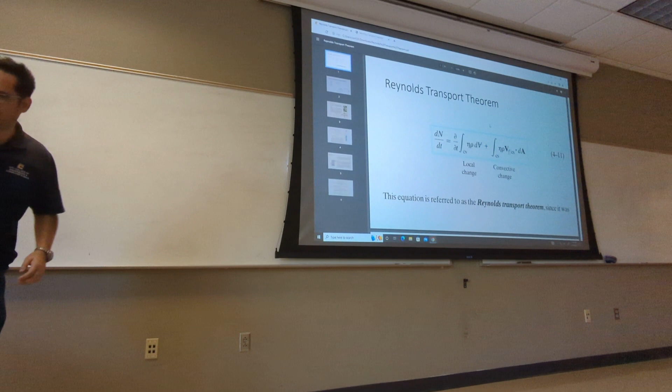All right, now let's go back to our discussion of conservation of mass. We started with something called the divergence theorem. This was our form.

I'm not going to write divergence, I'm going to just write: partial derivative with respect to t of rho dV, for conservation of mass, plus the integral of rho v dot n dS.

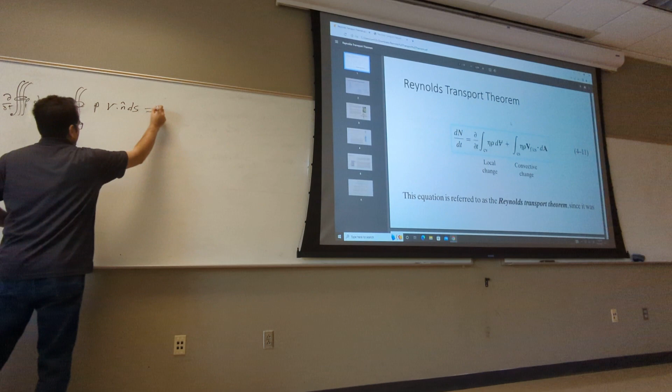So this was conservation of mass we derived, starting with the first principle that the mass of a control volume has a total derivative of 0. Then you use the concept that the total derivative is the inside local derivative plus the part that crosses the border, the mass leaving or coming in. This was the principle of conservation of mass.

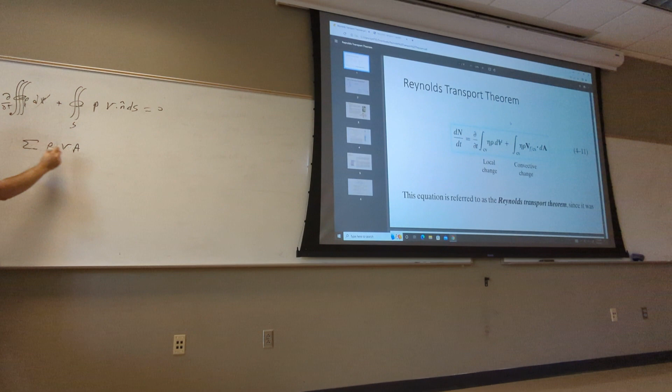We also simplified it for different versions - for example, the sum of rho V A is equal to 0, when you have a constant velocity profile.

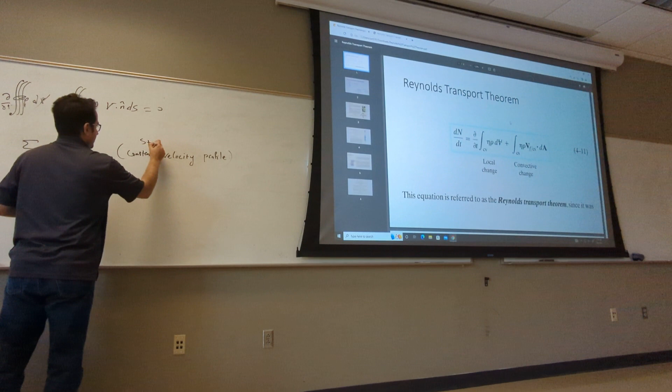So when you expand this integral, first of all this term is 0 for steady state with a constant velocity profile. Steady state means there's no derivative with respect to time, so this entire thing is 0.

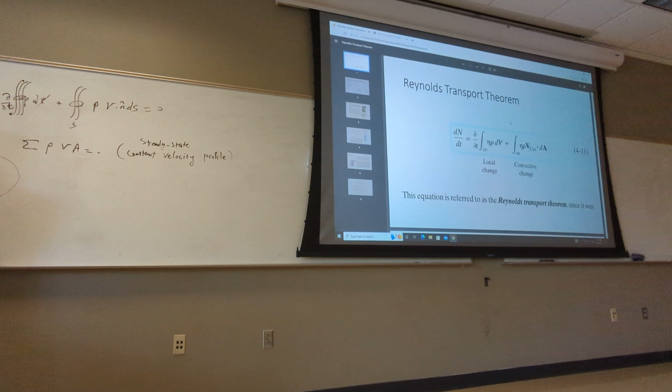And then this integral, when you expand it over the faces of this volume, gives m1, m2, m3, and so on. If we assume the variation of velocity over each face is just constant, we can take that term out of the integral.

And also constant density, or incompressible - aka incompressible. So for this assumption, which is usually these three assumptions together - steady state, constant velocity profile, and incompressible - these three assumptions usually happen in our field, mechanical engineering, for slow speed flow. Some of these assumptions don't hold in aerospace engineering, but in mechanical engineering, most often they do.

So with this assumption, you get rid of this integral, and because it's incompressible, the density is constant, so you take it out. Then v dot n dS over each face is integrated, but because the velocity is constant over that face - not the entire field, just over that face - the velocity may be different here, here, here, but over this face it's constant. You take it out of the integral, and you end up with this equation.

Also, the sum of the fluxes or mass flux—later we define the flux term precisely, but right now just take it as granted, like this is mass flow rate, m dot. The sum of mass rate is 0.

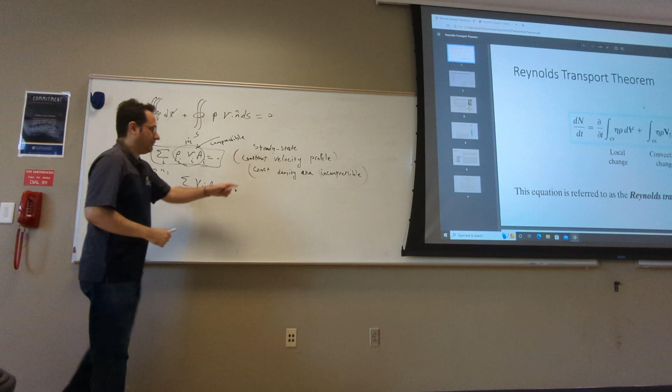Now, if you take it out of the integral, density everywhere rho the same, it's just non-zero times rho is 0. What? That means this term is 0. That means v dot a sum is 0. So this is for constant density.

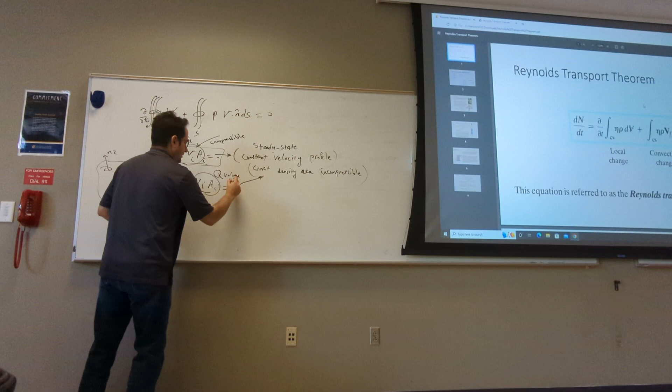So this one is more general. When the density is constant, you take the rho out and you get that. And then we name this as Q, or volume rate. And then we solve a bunch of problems.

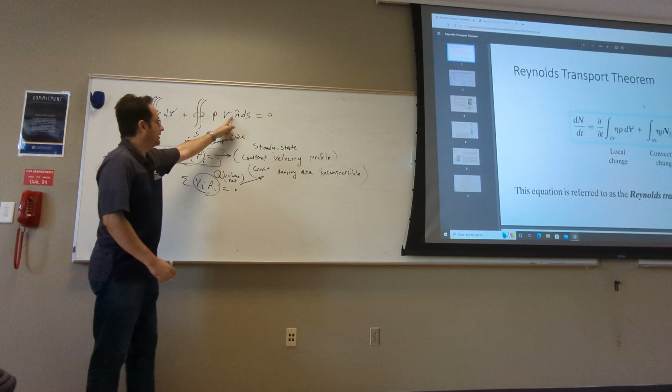But every time I give you a problem, you have to start from here and make assumptions. Is it a steady state? Yes, get rid of that. Go to the next one—is the velocity constant over the profile? Is the density constant?

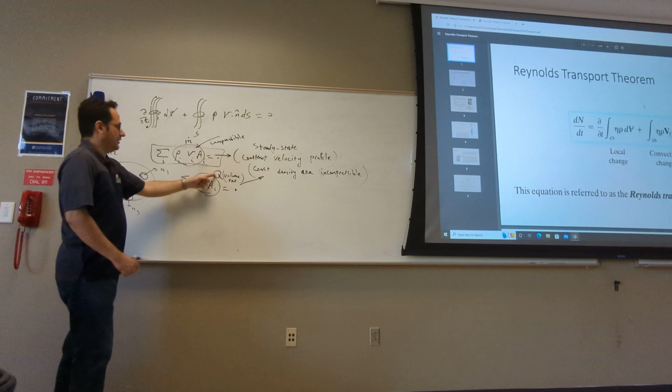If the density is constant, you can take it out, right? But if it's not constant, you have to take it inside this summation. So then you end up with that. This will finally, if all assumptions hold, give the most simplified version: that means the volumetric rate of the flow coming in is the volumetric rate of flow leaving out. And we solve some problems.

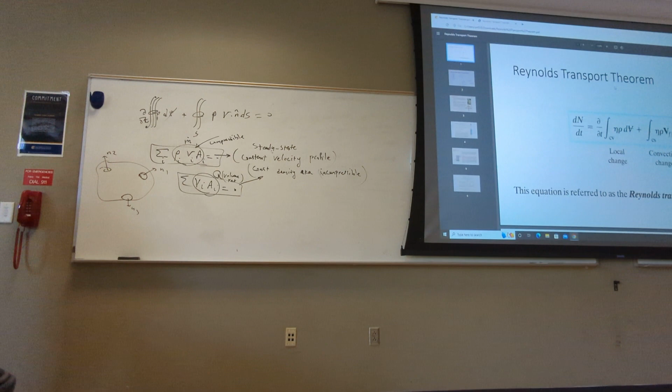Now let's go back to the way the book shows you the same thing we did. We have something called the Reynolds transport theorem. This is the similar approach using the Reynolds transport theorem—they just say the same thing.

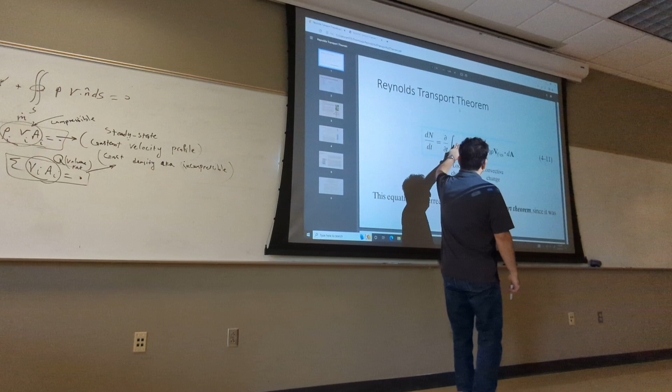The local rate of change over the volume—so eta here is like anything, a placeholder. It could be mass, just the way I said we had a box placeholder. You would place anything in it like mass, momentum, energy, and then you get different conservation equations.

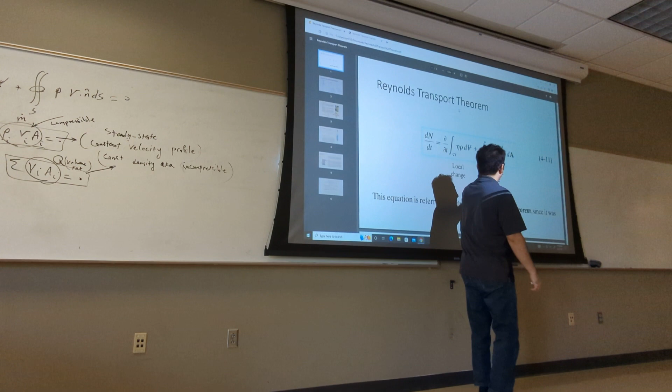This is just like that, plus the net flux passing through the surfaces—call it convective, from convection, the movement of fluid—is equal to the total rate of change. So we call this the Reynolds transport theorem.

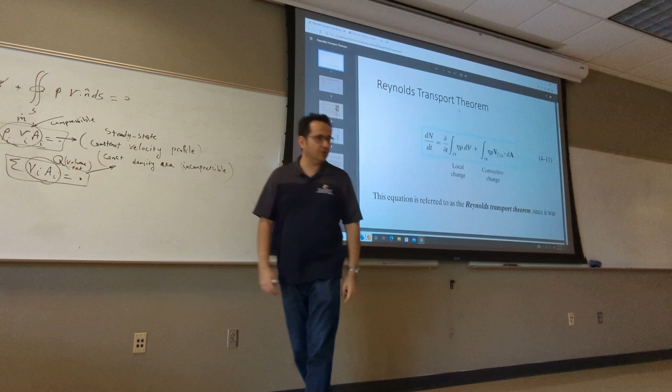We actually proved that using the divergence theorem. So not only did we take it as granted, but we proved using the divergence theorem that you can write this as a surface integral, and convert that to a volume integral using the divergence theorem. Then we end up with an equation like this in differential form: partial rho partial t plus divergence of rho v is equal to 0.

Now the way this book does it, it doesn't show you everything in one point, which is the way it should be—because if you see everything in one point, it's not really distracting you from the concept. The way the book does this, he makes one chapter for that, starting from scratch, not from here, and he takes an infinitesimal element.

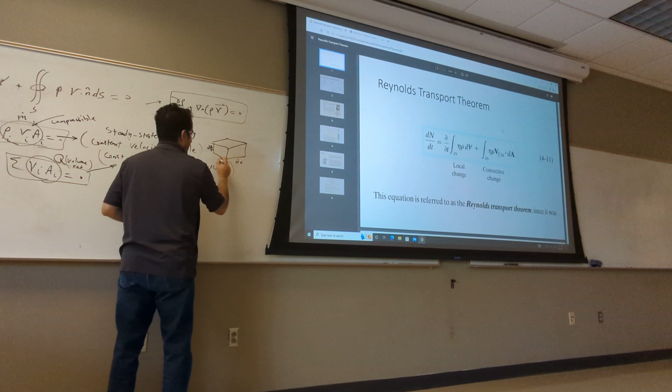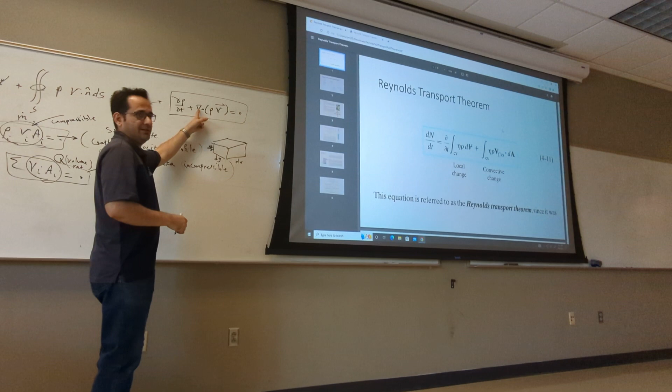So this is like dx, dy, and dz. And for that, he uses calculus in a very approximate, crude character, which is not accurate in general. And then he derives that, and it's like a 20 page derivation—this is chapter 7, if I'm not mistaken.

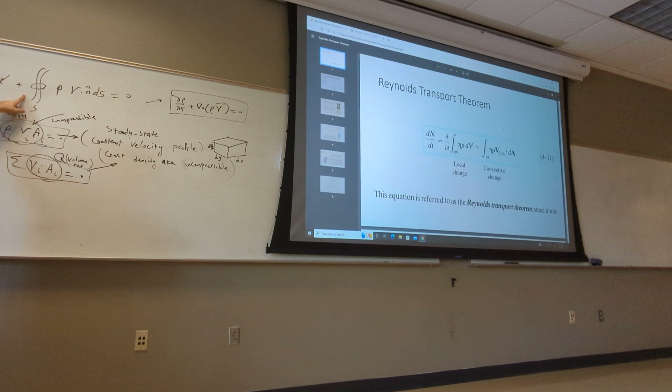We don't need to do that. We just start from that—we already showed that, and we apply the divergence theorem, we get that. This is in the notes, the lecture notes from previous classes. Now all we need to do is just solve some numerical problems, because we know how it's derived.

Now, for this problem, again, you can apply this assumption. What if I have a steady state? For this, it's differential—call this the differential form.

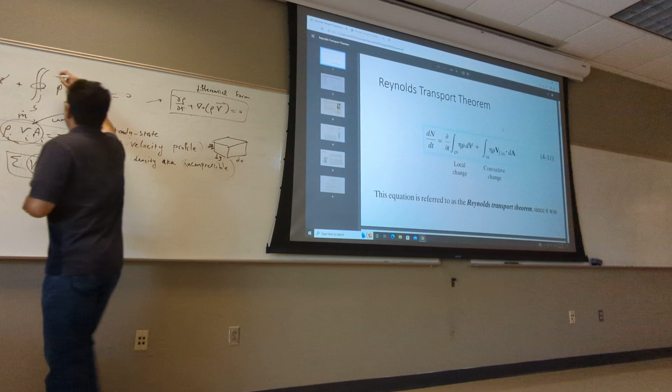Differential form. They call this integral form. Both are the same thing, but this is for a big volume, macroscopic. This is for point-wise, microscopic. So these are the same thing, but written for different control volumes.

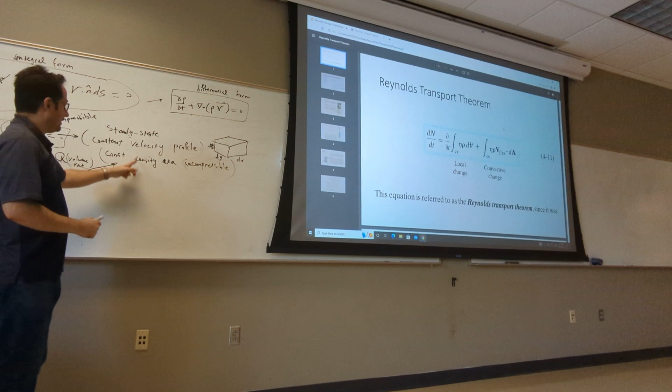Now, for example, I can do the same thing for the differential form, which is chapter 7. So if I have a steady state, what do I get for that? If steady state, what do I get? 0. So for a steady state, again, divergence of rho V is equal to 0.

This is called the steady state conservation of mass. The conservation of mass, or continuity, AKA the continuity equation.

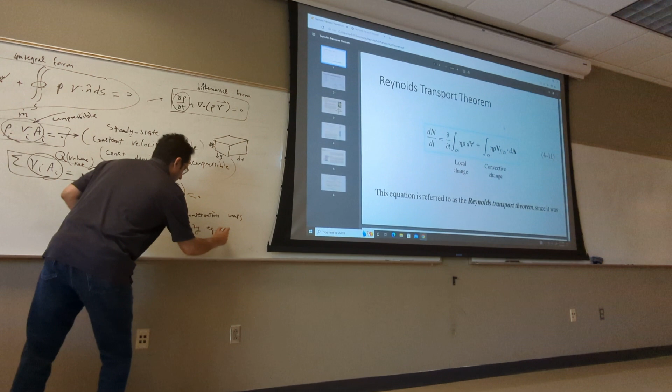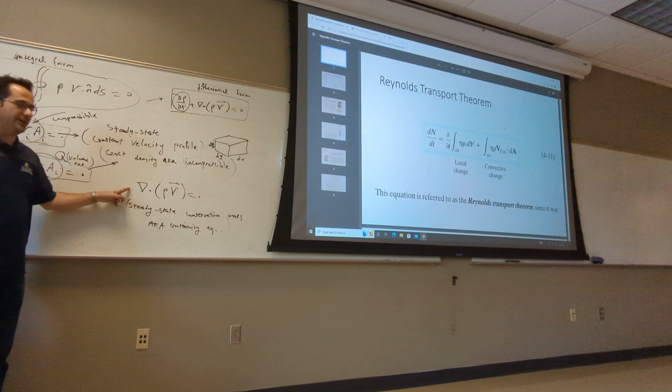Now, if it's incompressible, what do I get? When the density is constant, can I take this density out? Yeah, so you get divergence of velocity is equal to 0. Add to this, plus constant density or incompressible.

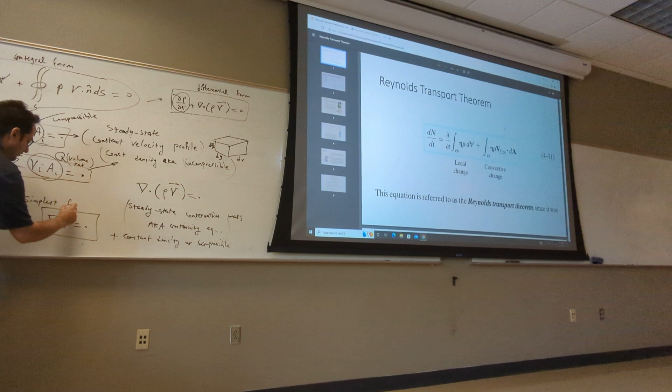So as you can see, this is the simplest form. In differential form, it's called divergence of velocity is equal to 0—this is the simplest form in differential form. The simplest form in integral form is the sum of the volumetric rates is 0. These are the same equation. Now the way the book does it, he has one chapter for that, one chapter for this.

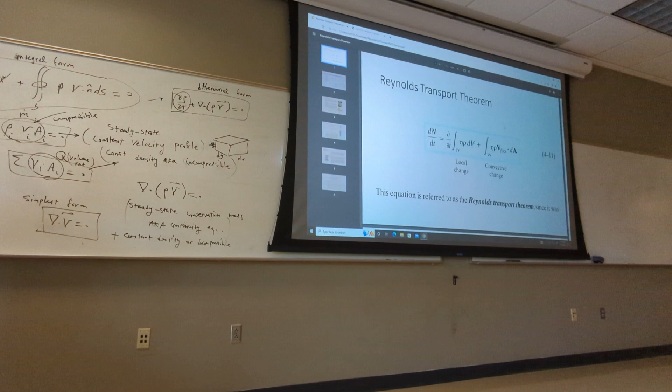Why? This can be beneficial to learn, but also it's distracting. The student may think, okay, this is a different thing, totally different. No, they're just the same. If you follow the divergence, that's the reason I'll teach you divergence here, which is not in the book. Because if you know that, you know all these are just convertible. You can start from here and convert to that. So now, after this, we go to the next one.

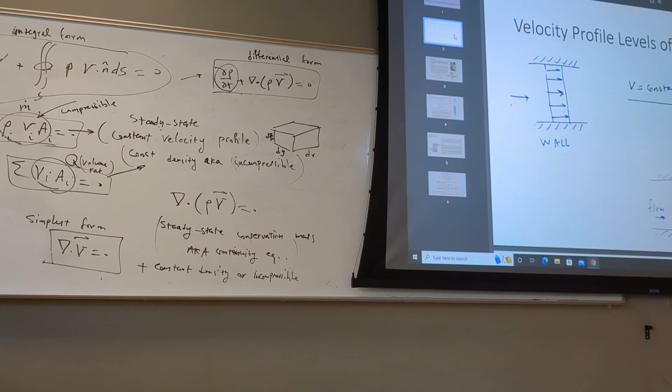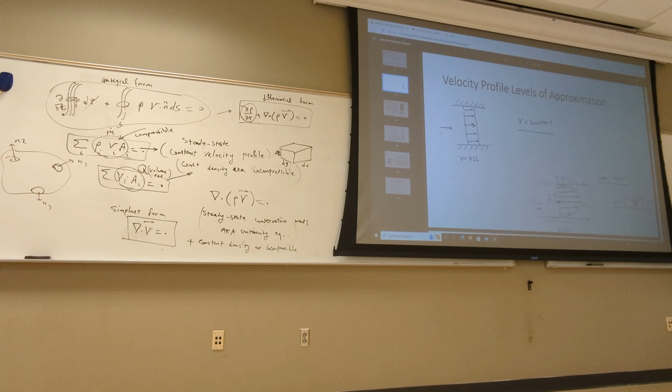One thing I want to talk about here is velocity profile. As you can see, we had an example like, we had a tanker and 2 inlets. And usually the way you see it in the drawing, when engineers make the drawing, you see something like V1, V2, and call this V3. They show it just like that.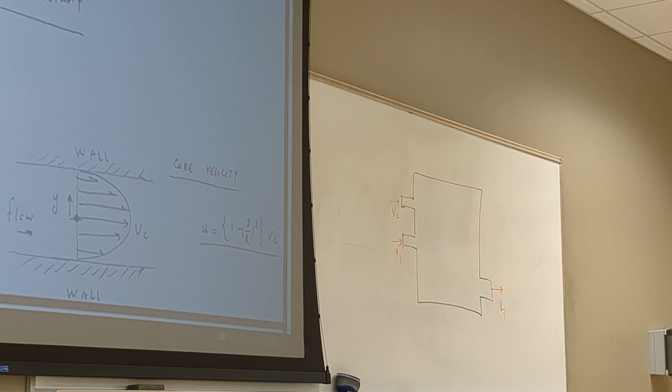But look, in real life, if you have a good camera, if you can zoom on this cross section, I'm going to draw that here, zoomed. What you have is this. This is the upper one, this is the lower one. And the velocity is not constant. The velocity is like 0 here, then 1. Why? Because it's viscous. And you have a sudden increase in the velocity, and then it goes back like this.

That's the velocity profile. When we say constant, it's not actually constant. There's no way on the wall it can avoid going to zero. It must go to zero. So the velocity is almost constant here. Again, you have some variation, but roughly constant here, but zero at the wall.

Now you may ask, why do I get just one row, a constant? The answer is, assume the fluid doesn't have any viscosity, zero viscosity. What happens? If it has zero viscosity, there is no attachment to the wall. The flow goes everywhere. Imagine, this is not going to happen in real life, but imagine there was no viscosity. The flow would pass through this outlet with constant velocity. Why? Because it doesn't even feel the wall. The only way to feel the wall is to have viscosity attachment.

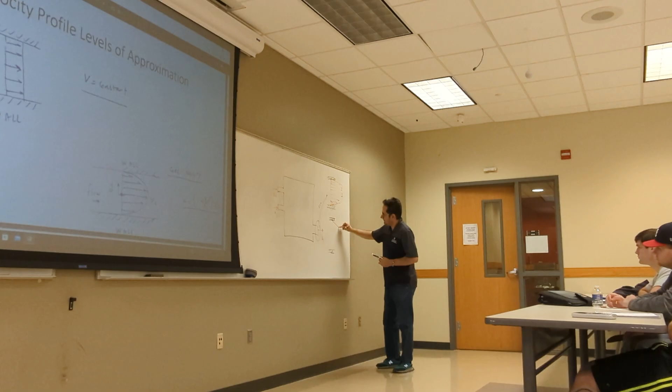Imagine the fluid was not ideal. Then what you have is like this. We call it V core, or core velocity, the velocity at the very center of the core, and then it's zero on the top, zero on the bottom. Now, if you put your coordinate system here, this is y. So y is 0 here, y is equal to some distance, call it r, or you can just call it a.

So the velocity profile in this case is written as u versus y equals V at core times 1 minus y over r squared. This is a parabolic velocity profile. You can see that if you plug in r, and this r is in fact y, if you plug y equal to r, what do you get? R divided by r is 1, 1 minus 1 is 0. If you plug y equal to 0, what do you get? 0 divided by r is 0, 1 minus 0 is 1, times VC, V at core. So you get this velocity profile.

Second order parabolic. You may have third order. These are just approximations. But this is more real when you have oil or honey, a very viscous fluid in a small diameter. But if you have a very large diameter or gas or something, you can say the slope here is so sharp that you almost see a constant, just like here. I'll show you here. V constant. In that case, V core is just the same.

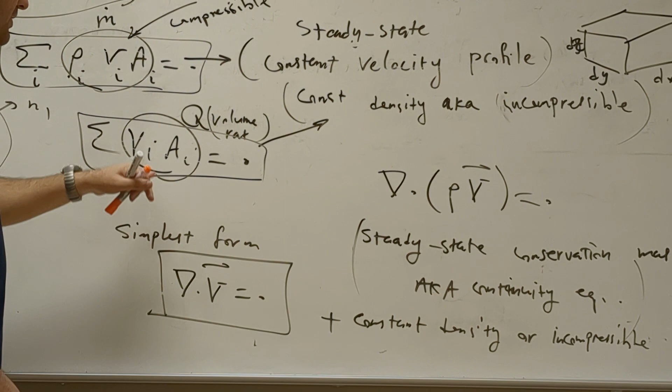This is just a hint: when I give you a problem, always ask, is the viscosity effect important? If it's important, you have to take the second order parabolic relation, and you can't start from here - you get a zero. You have to go back and ask again: is it a steady state? Yes, zero. Is it incompressible? Yes. But is the velocity constant? No, the velocity in that case is not constant. So instead of this form, you have to have this: the integral of v dot n ds over the surface equals zero.

For the constant velocity, you get that out of this when you expand the integral. Make sure you don't make these mistakes on the test.

Now the next question here, it's one of the problems in the book. It says you have a water hydrant, and it's got two outlets. Now we need to dim the light. You already solved a few problems. The participation is not good today. So here you have a water hydrant, and the diameters at different points are given, as you can see. Let me see if I can zoom here.

There you go - here is 75 millimeters. The velocity is also given. Now every time velocity is given like just one data point like that, it's implying that it's most likely constant. That means either the diameter is so large or the fluid is not very viscous at that velocity, so the parabolic effect is not as strong. So you always have a constant. So at this point, also the velocity is given.

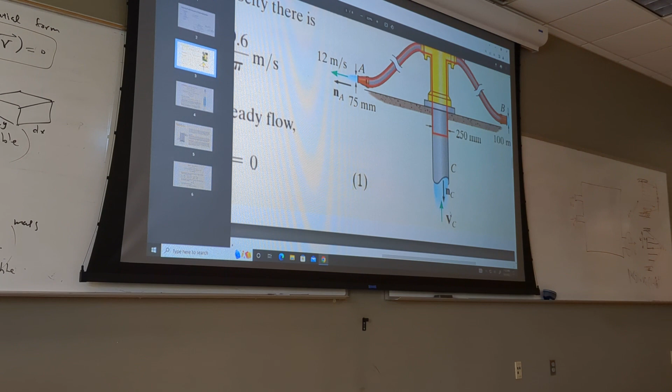So when you dot product NC with VC, what do you get? Positive or negative? Negative - they're 180 degrees out of phase. So you get a negative here. And then VA dot NA - look here, NA and VA, are they in the same direction? Yes, so the dot product should be positive. What about the other one - are they in the same direction? Yes, positive. So all of them are positive except C.

Now you substitute numbers into this equation: you get velocity at C times AC with a negative sign, plus velocity at A times AA, plus velocity at B times AB, equals zero. Do I have velocity at B? No, that's actually the unknown in the problem. And then you solve it for velocity at B. Now you can also find the volumetric rate, but you have to read the question carefully - like on the midterm, when I say midterm, it's going to be the next midterm.

You have to read: am I asking for the velocity? Am I asking for volumetric rate? Or am I asking for mass flow rate? That's the most frequent one, I usually ask for mass flow rate. So if I ask for mass flow rate, what do you report? Are you going to report dV? No. So what do you write? The answer.

If I say find the mass flow rate at B, you do rho times that. Rho times Q. It's just a definition.

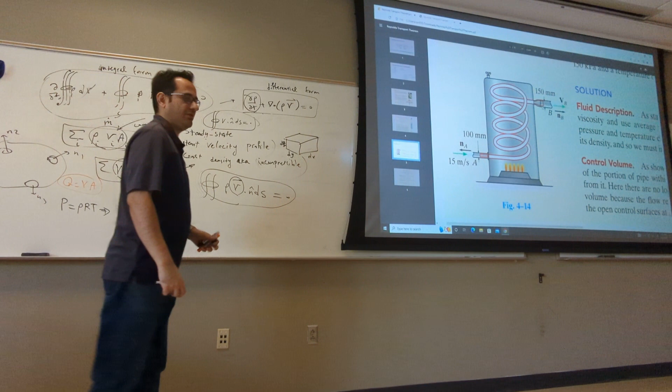But look, the density in this cross section is rho A, and here is rho B, so I cannot just take it out and say 0. So I have to evaluate this integral over all the faces. So let's say we have 3 faces: one here, face number 1, the other one is the wrapper around this, face 2, and then face 3 at B. So this pipe, which is my control volume here, is enclosed by faces 1, 2, 3. And then I evaluate this integral over each face, so it's going to be the integral over S1, or call it SA, over A.

SA, rho V dot N ds plus the next integral over the surface of the spiral, rho V dot N ds plus the integral over the final closing face B, SB, rho V dot N ds. This sum, according to continuity, must be 0 because it's the total change in the mass of the system. So what do I get for this step?

Tell me, what's the direction of velocity on the wall? Everywhere, this is the normal, and this is the velocity. Everywhere at the wall in this spiral pipe, what's the relation between velocity and normal? They are orthogonal, so the dot product is 0. So this entire thing is 0.

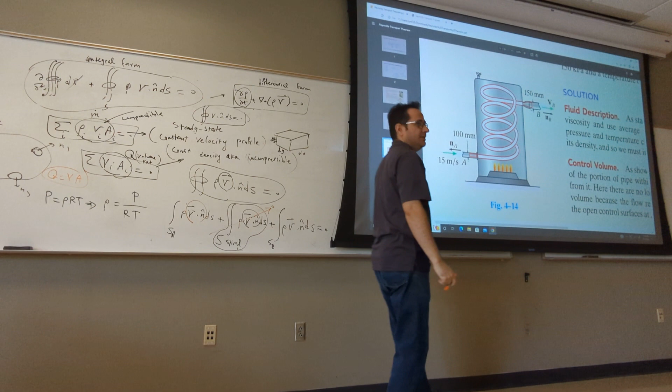Now here, V dot N over A. What do I get? N is this way, V is this way, so V dot N is negative. This guy becomes rho, and then VA, and it's negative.

Now look, rho is not just rho in the entire fluid, it's rho at point A, because after this point I heat it up, and rho will change at that point according to the equation of state. So it's rho A, VA, times the area at A. Why? Because this S, when you take the integral, it's going to be V times S.

And then finally this term, what do I get for that? Rho B, VB, AB. Is that right? Positive or negative? It'd be positive. That's right.

Quiz waiver. You see, always hunt for quiz waivers. They're very, very random, unexpected. The only way you can hunt it is to fully listen to what I say.

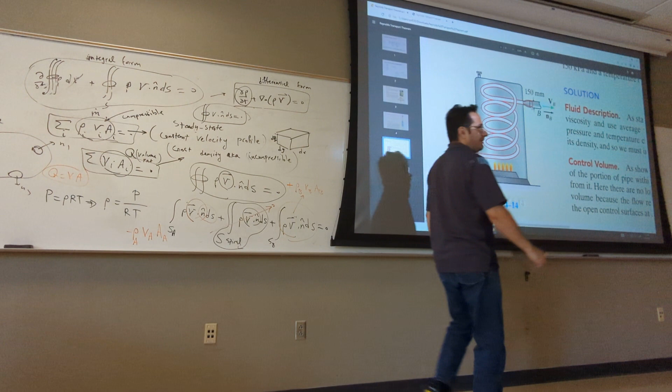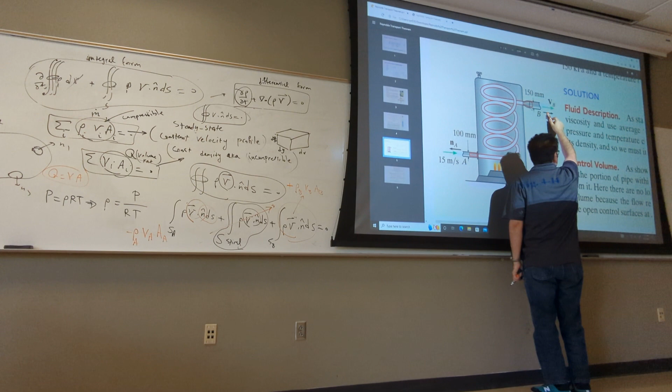So look, how did I get that? You just come here and evaluate the integral over this. I know the velocity is the same direction as n, so v dot n is positive VB. But as I take the integral, there is the AB, and the density at B is not just rho, it's rho at B.

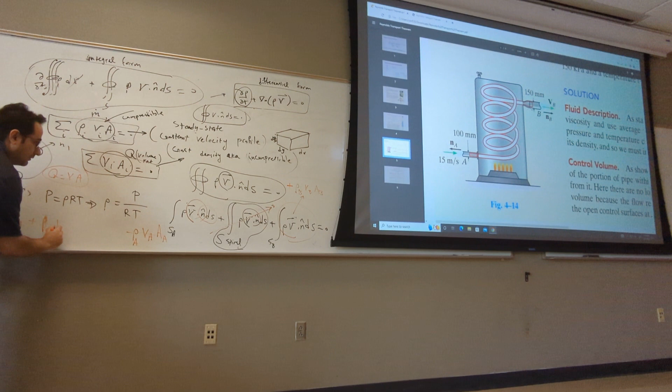So put them together, what do you get? You get right here: negative rho A, VA, AA, plus rho B, VB, AB is equal to 0. That's what you get.

So the answer, the way the book solves it, starts with the general conservation laws, then goes to the assumption: is it transient? No, 0. And then you evaluate the integral, and you get the same relation. You put a number, and you find the relation between rho A and rho B.

Now you apply the knowledge from the previous chapter, equation of state P is equal to rho RT. When you apply that relation here, you get P at A, you have a relation here, you put the temperature, because the question gives you the temperature and pressure, and you get the ratio between rho A and rho B is equal to 1.60. Put it in this relation, and you get VB is equal to 10.7 meters per second.

We're just playing with the equations.

Now in the midterm, I may just give you this. And I say, well, consider the velocity here is parabolic, not constant. Let's say the velocity here is like this, you see the cursor, like that.

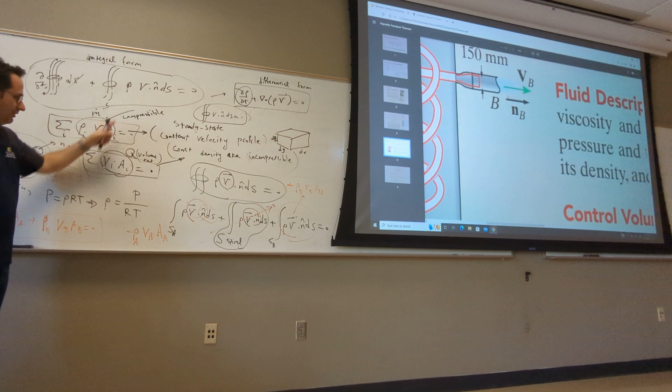And solve it if the velocity is parabolic. Then you start from here. What do you get? 0, not transient. Here, what do you get? You get something like that. This is 0 again. You get this, but when you evaluate this integral, you cannot simply say v dot n and take it out of the integral, like I did here. You have to evaluate the integral over that surface.

And if you can't evaluate the integral over that surface, because this was covered in calculus, unfortunately we don't have time to help you. The only way I can help is if you come to my office and we practice individually. There is no other way. You don't have time in class to go over the very basics.

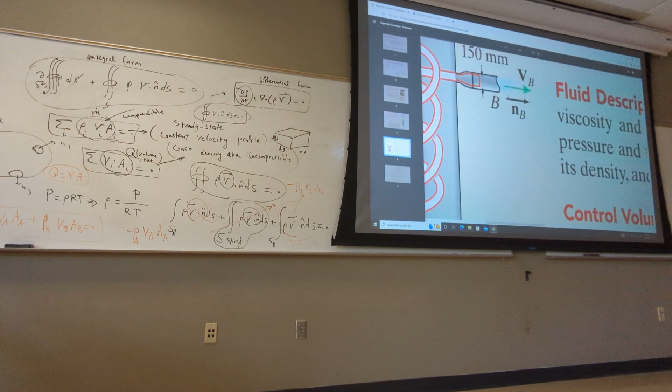Next problem. So basically we already solved, I think, 3 more problems last class. We also had a moving control volume. So I think that's enough for conservation of mass. Now we want to go over conservation of momentum, chapter 5. So let me erase this — actually, I do not erase that.

So the next chapter after conservation of mass in your book is the energy equation. You have conservation of mass, and then he goes to the energy equation, and then he goes to momentum. I found it a little bit distracting to go from conservation of mass to energy, because that's not the way the Navier-Stokes equation is even written.

The Navier-Stokes equation is written like this: you have conservation of mass, which you already have, then conservation of momentum, and then conservation of energy. These all together constitute something called the Navier-Stokes equation. So after conservation of mass, the most natural choice is to go to conservation of momentum.

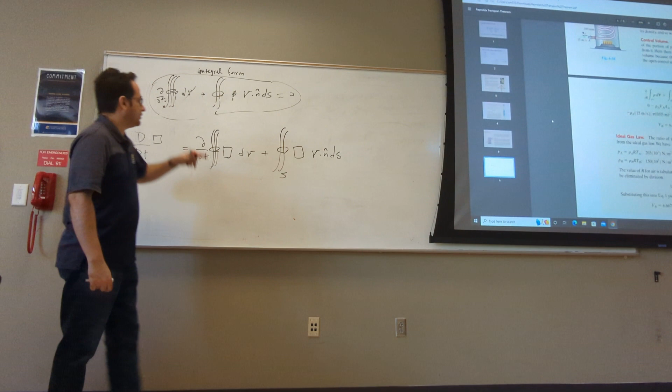equals the local derivative plus, this was the volume, plus the surface integral of v dot n ds. And I said this box is just a dummy placeholder, you just substitute things. Like if I have mass, mass is what? Rho times volume, right? So if I take mass per volume, which is density for the entire thing, you just plug in rho, and then you get what?

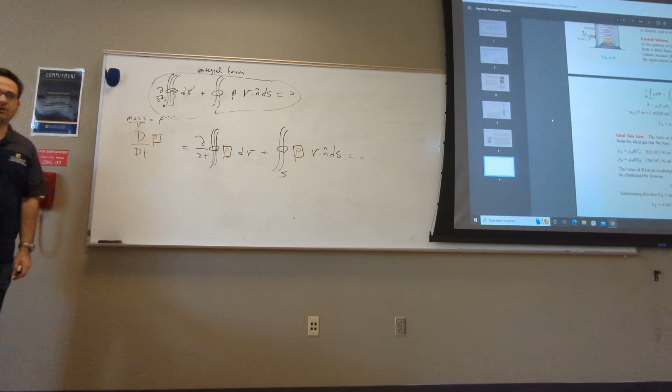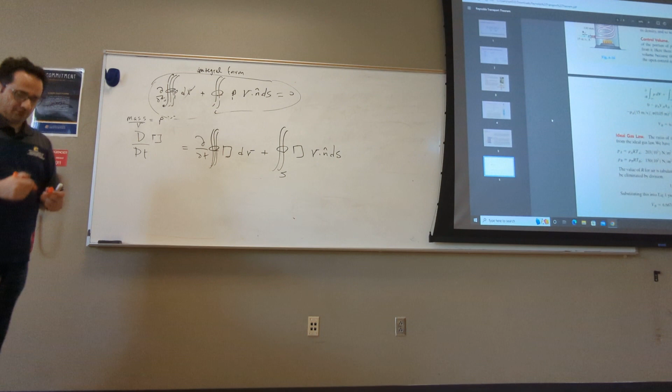Now, instead of rho, let's substitute momentum. But before we substitute momentum, I have to define what the momentum is. This is generic. So before I substitute the momentum, we have to talk about what momentum is.

Now we go back to Newton's laws. Newton's second law says sum of forces is equal to ma. This is a vector force, and the resultant force on the system is equal to the mass of the system times the acceleration of the center of mass.

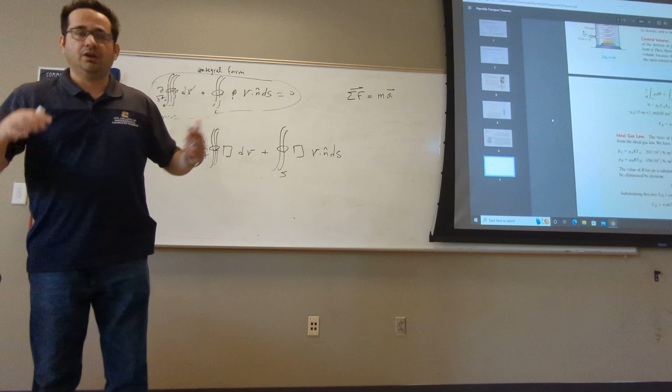How many of you guys didn't have dynamics? You didn't have dynamics? Okay, we should have done. I haven't, yeah, all right. So what about vector statics? Everybody has vector statics? So here is the thing.

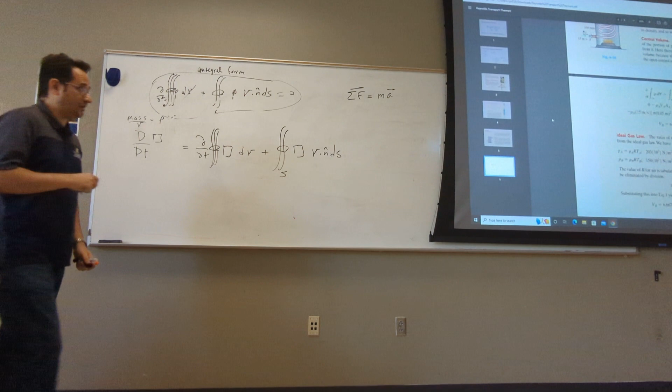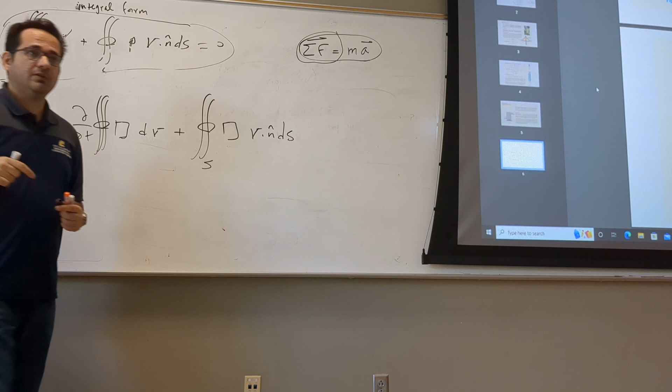You see, this classification isn't very different. When we say vector statics, we're talking about this one. When we say dynamics, it's talking about this one. And if you know the 5 steps - system, FBD, equation, solve, verify - you don't have any problem between vector statics and dynamics, except in dynamics you have to have an inertial force on your FBD. The way you put it, you just plot it like vector statics, but with the opposite direction of inertia, and then the problem becomes vector statics. If you haven't studied that way, you really need to go back and study it in unified form.

Because all these courses are just the same. You just look at a special instance of each one of these.

Now look at this equation. This is a simplified version. The actual version of Newton's law is sum of forces equals, you see this is dv dt, acceleration is the time derivative of velocity. But if you take the mass inside that, you have d dt of mv. This is the actual momentum equation.

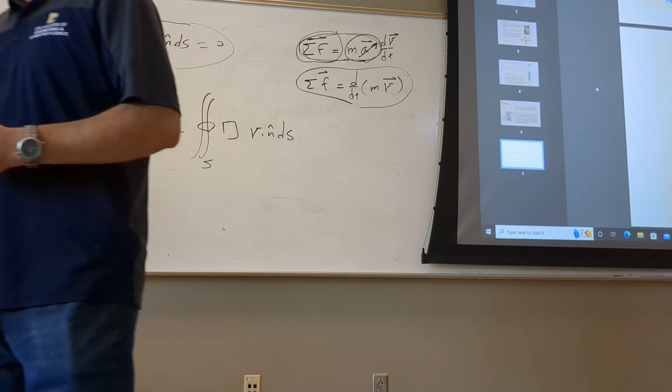Now in three-dimensional space, I want to ask someone - do not answer it. In three-dimensional space, how many equations is that? 1, 2, 3, 4, or 6? In three-dimensional space, how many equations is that? This equation by itself, how many equations in 3D?

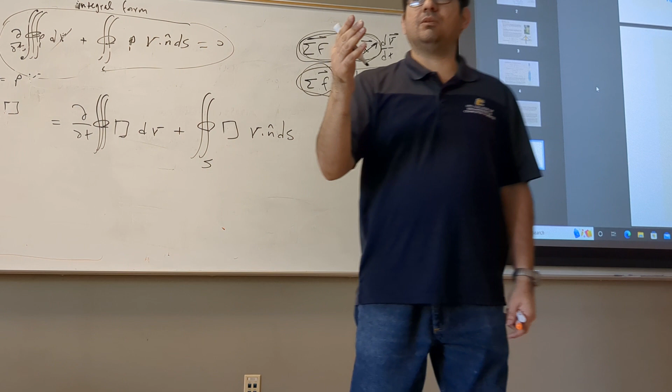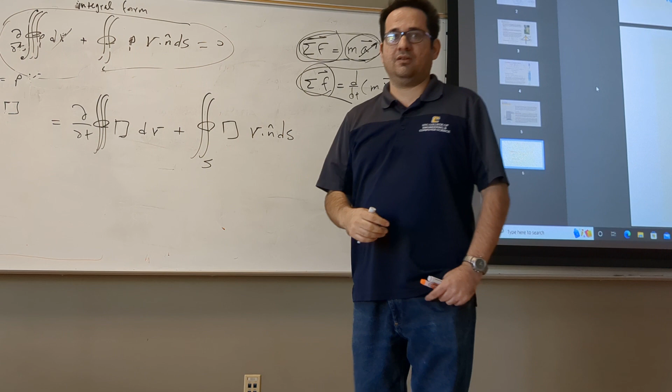What is this? Sum of forces, which is a vector. In 3 dimensions, how many pieces of information do you need to express a vector? 3. So this is just 3 equations, it's not 6. So it says sum of force in X, momentum in X.

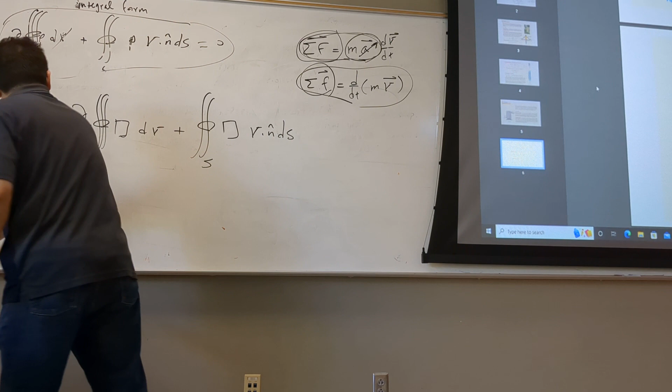In fact, you can write it like this. Sum force in X is equal to d/dt of mu. Sum force in Y is d/dt of mv. Sum force in Z is d/dt of mw.

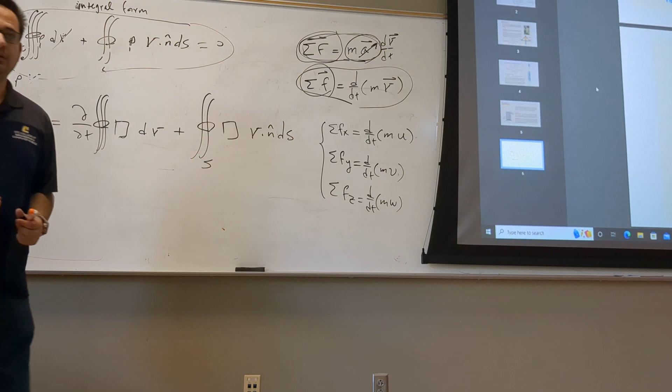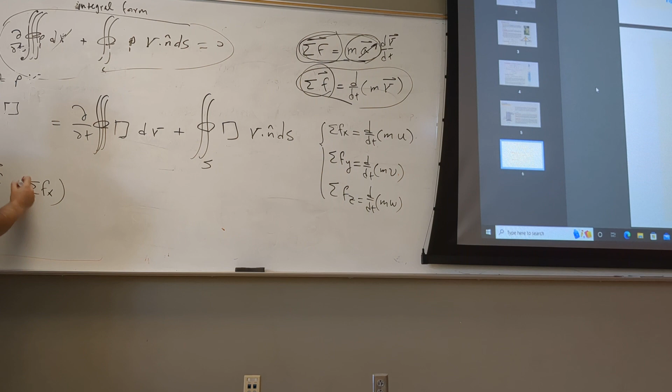I should not need to explain this, but I'll do it again and again since this is something you should know by now. The way you derive this: sum of forces F is sum of force in X times I, plus sum of force in Y times J, plus sum of force in Z times K. That's the left hand side. For the right hand side, you have d/dt of mv.

Then you substitute V with the relation: d/dt of m times, for velocity V, u times I plus v times J plus w times K. Now simplify it, take d/dt in, so you get d/dt(mu) I, plus d/dt(mv) J, plus d/dt(mw) K.

So look at this, that's the end result for that, and the end result for force. Now according to Newton's law, these two are equal. This is called Newton's second law. We usually go with acceleration, but in the correct form, they define this as momentum. They call this momentum.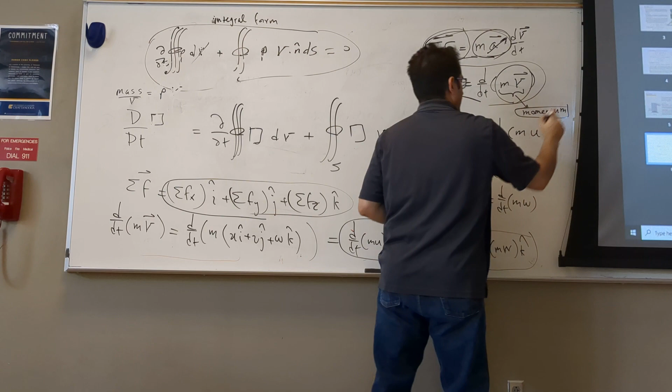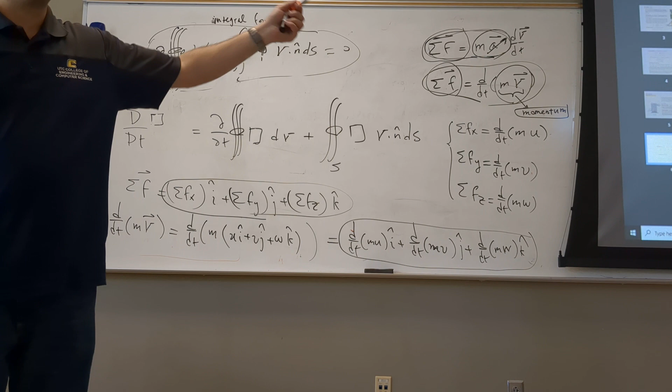So when you write it in vector form, that little equation right here is three equations. It's not just one line, not one number. If in the midterm you just write one number, you get a 0, I don't even grade the rest. That means you've never understood it, never practiced it. This by itself is three equations.

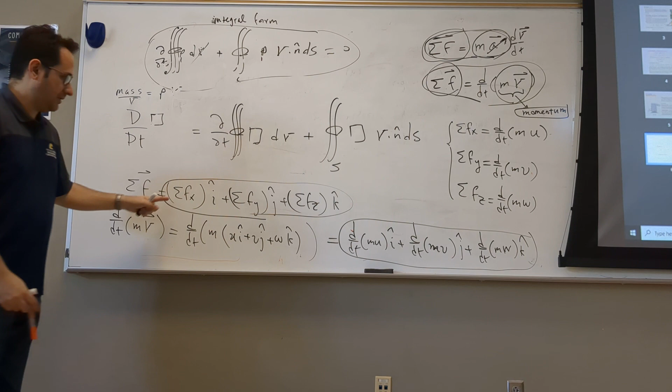Here, force is this, momentum is this, make them equal. So the x component: after you make them equal, the coefficient of I, which is these two guys, they are the same. The coefficient of J, which is these two guys, are the same. The coefficient of K are equal, same. Vector identity.

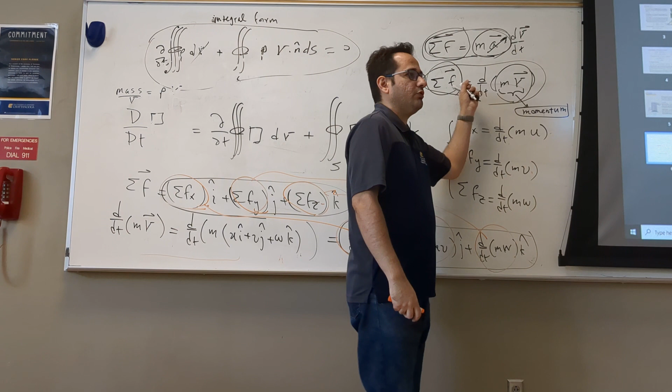So that is your momentum equation. Now I want to apply this to my control volume here. You see the dummy placeholder here. So let's do that. This needs to go up.

As you remember, when we put mass here, we didn't put m, the mass, we put rho, which was the mass per volume, the normalized mass. If I normalize my momentum by volume, what do I get? If I normalize mv by volume, you get rho times velocity. So the one I plug into my generic relation is rho v.

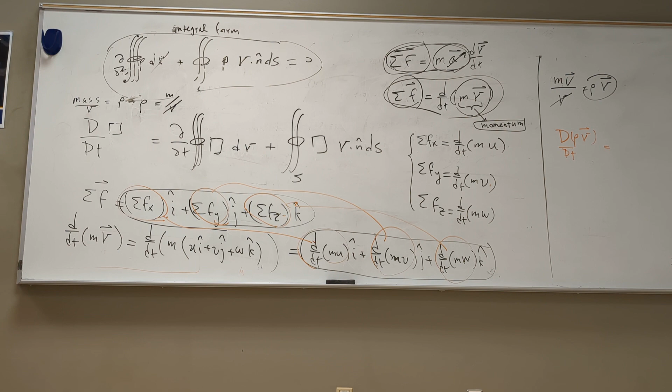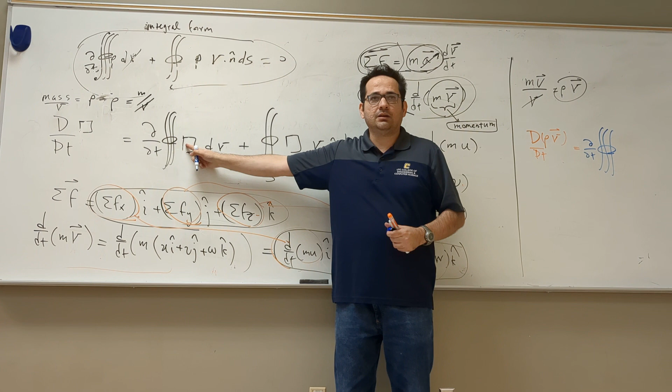So let's do that. I plug in here, starting with the left side: the total derivative of rho v dt is equal to... let me use the relation: partial derivative with respect to t of the volume integral of rho v, dV. And this V is not velocity.

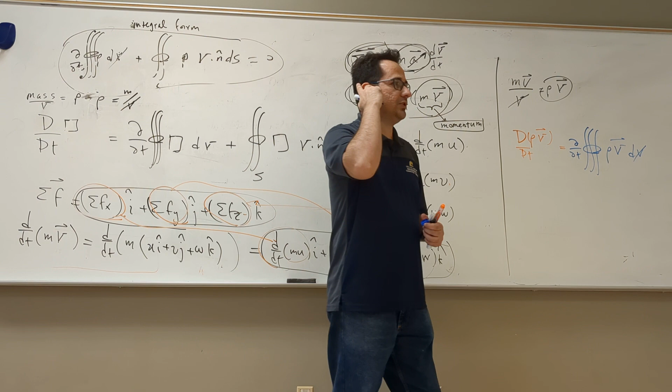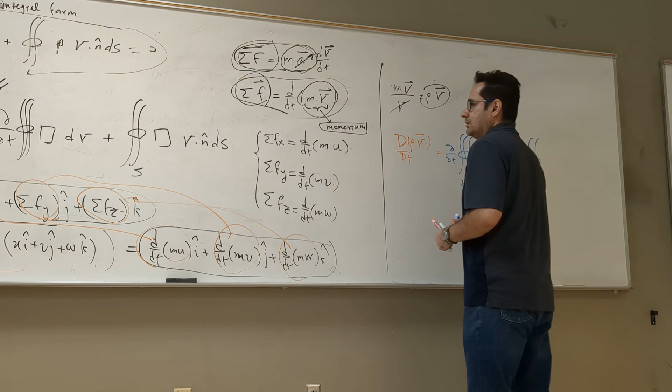That's the reason some books have problems distinguishing volume and velocity, they put a dash on it. So this is over the closed volume, plus the surface integral. What should I put here? Rho V. And then it also has a V dot n by itself, and we've talked about that a lot.

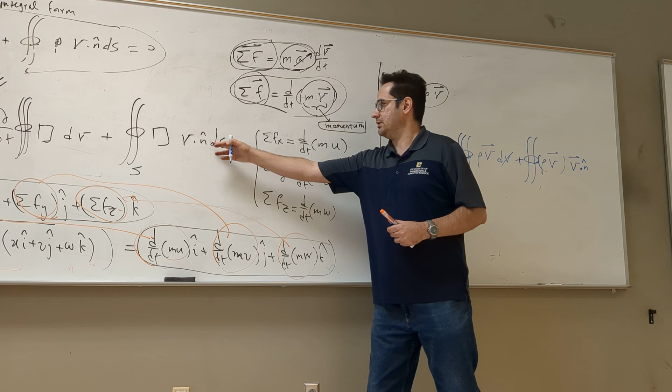So the total time derivative of momentum, is it zero? Newton's law — we just wrote it. Momentum is conserved, so there's no change? No. Newton's law, I just wrote it and erased it.

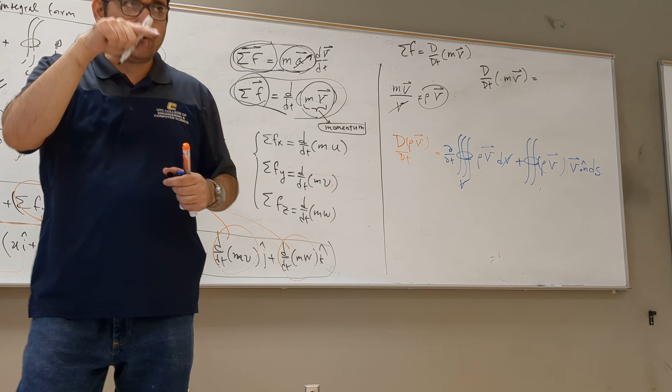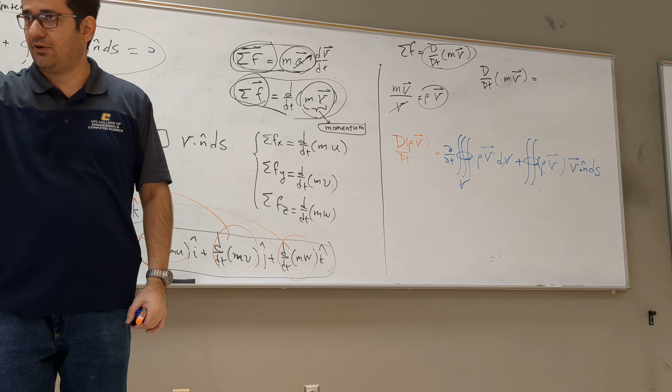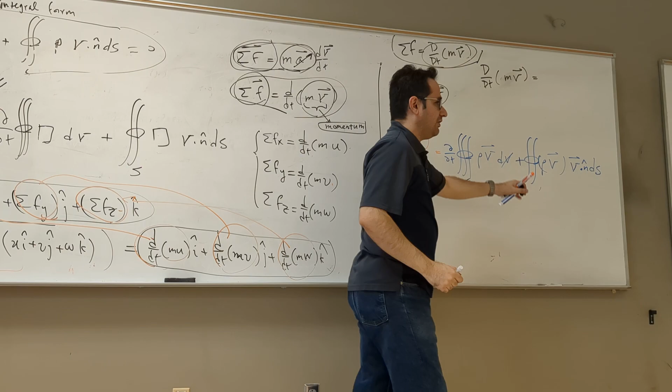Sum of force is equal to d/dt of mv, right? I use lowercase d, but it's the total derivative — some books use lowercase, some use uppercase. So the total derivative of momentum is the sum of the forces on an object. If the sum of force on an object is 0, we have conservation. Looking at the total view, this is conservation, because the momentum derivative equals the sum of forces, so this integral must be equal to the sum of the forces over the control volume.

Now derive this at home, pay attention. Next class I'll start with this and derive a relation for sum of forces on the surface. After you do that, you get the full momentum equation.